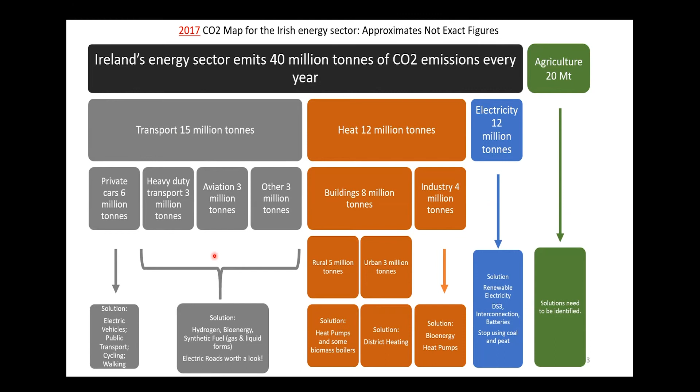So for the talk today, I was just going to briefly give you some of my thoughts on what the journey will be for the electricity, heat and transport sectors based on some work I've been involved in different parts of my career to date. I think just to say as well, the 51% target that we have for our carbon emissions by 2030, because a lot of what I'm thinking of in this talk is that short-term target of 2030.

It effectively means we need to get to 19 million tons of carbon approximately in our energy sector. So from the 40 we're at today, 51% reduction is about 19 million tons by 2030. So that's a number I'll refer to a little bit when I talk about what I think is feasible across the electricity, heat, and transport sectors.

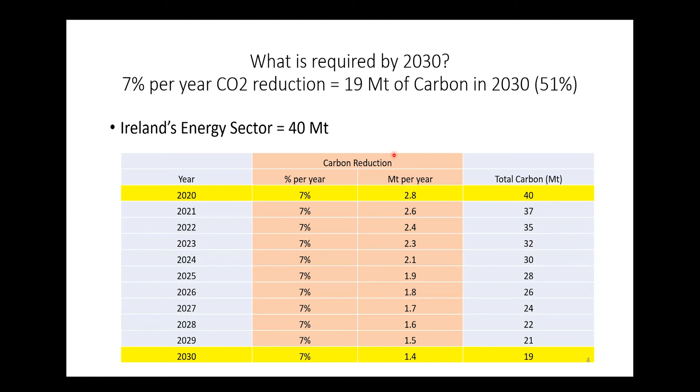So then just to get started with electricity. So the electricity is the 12 million ton block out of the 40 million ton block. So currently we have an ambition to get to 70% renewable electricity by 2030. That was a commitment made back in 2019 as part of the climate action plan, the first ever climate action plan published by Minister Bruton back in the middle of 2019.

So the 70% renewable electricity target, and again, the most important number that matters is not the renewable electricity target, it's what it means in terms of carbon emission reductions. That should get us from about 12 million tons of carbon today down to around 3.5 million tons of carbon by 2030. So that's a wonderful step in the right direction and a huge contribution to reducing down to that 19. So we need to reduce by 21 million tons over the next 10 years. This is going to get us about 8.5 million tons of that. So a really, really good start.

And because it's such a major contribution, I thought it'd be good to start here, because to say it's easy to achieve is wrong, but to say it's probably the easiest to achieve out of everything is probably right. So it's certainly not easy, but it's probably the easiest of all the things we have to do across the energy sector to get to this 70% renewable electricity target, because what it effectively requires is more of things that we're already good at. So we're really good at renewable electricity.

We've built just over 4 gigawatts today. To get to 70%, we'd probably need to get to around 10 gigawatts by 2030. We need more grid capacity, which is more ability to move electricity around the country. We need to get better at integrating our electricity. And some of the metrics that are often used about how good we are at integrating electricity are things like SNSP levels. So how much electricity from wind and solar can you have at any one time on the grid? Currently, that's at 70%. We'd need to probably get to around 90% plus to get to a 70% renewable electricity system.

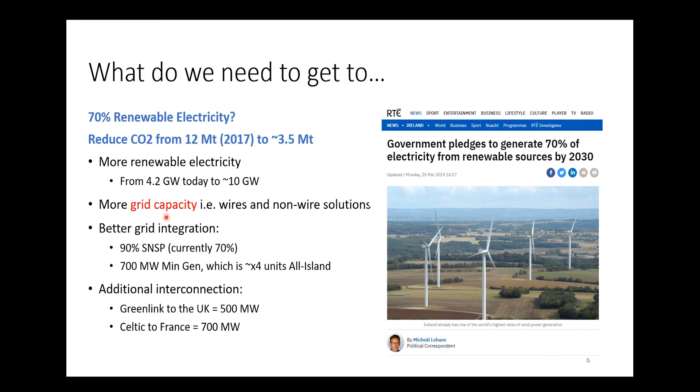Just to give you a flavor of some of the numbers of what's required, these are estimates we would have done with the Wind Energy Ireland members during my time to look at how much grid capacity is left in the Republic of Ireland right now. These are our best estimates, but they haven't been verified by EirGrid and ESB Networks. But just to give people a flavour, we found that in our best estimate there was around 2 to 2,500 megawatts of grid capacity left in Ireland's onshore grid.

So if we're at 4,000 megawatts today and we need to get to 10, we need to get another 6. There's only 2.5 of capacity left onshore to fill that up, and then it's full, completely full, and that's absolute max available. And then looking at offshore, which is another very, very promising area, there was a study done by EirGrid looking at what's feasible there, and 1.5 to 2 gigawatts is currently identified as available in Ireland's East Coast sector.

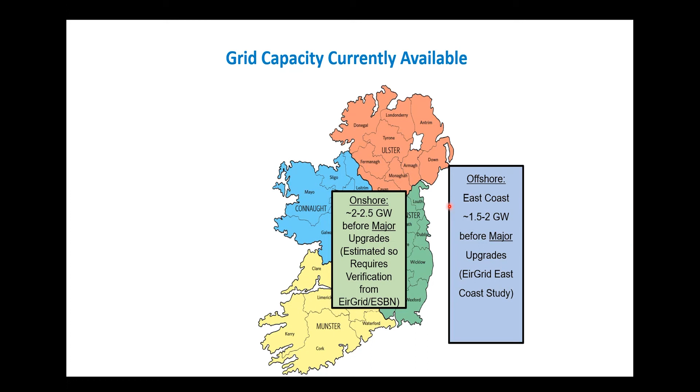So again, in terms of what we need to do, there simply wouldn't be enough grid capacity available to meet everything that we need to meet. So grid capacity is going to be a major barrier to getting us to our 70% renewable electricity target. And that's the one I just wanted to highlight in lights, because I think it's the one that's going to be the biggest challenge in the coming years.

And I think after going through all of that, 70% feels very, very achievable. I think we have an awful lot of the groundwork done to get us there. And the reason I'm saying that is I think there could even be scope for electricity to do more by 2030, because we have so much of the building blocks in place to get us to 70% renewable electricity that we should think further than 70%. And I think that'll become more apparent when I talk about just how challenging the things we need to do in heat and transport are in comparison to what we could do in electricity.

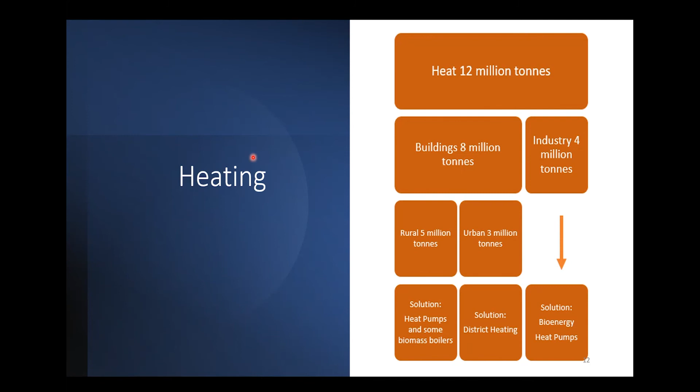So heat's next. So I'll take a few of my thoughts on where we're getting to zero carbon in the heat sector. So the first thing I'll do is just talk about the heat demand. I think the heat demand is far more important than the electricity demand in terms of understanding its characteristics. For electricity, a unit of electricity used by a large industrial plant is the exact same as a unit of electricity used by an individual for their kettle. The electricity grid has only one type of electricity on it. And that's very different to the heat sector. The heat sector has very different types of heat depending on who's using it and how they're using it.

So just to give you a flavor of the Irish heat sector and how it's broken down, about 45% is by people in their homes. About 20% is commercial buildings, so your shops, your restaurants, your small commercial premises. And then about a third is large scale industry, the likes of Aughinish Alumina, Guinness, those large industrial plants that you'd see around the place. So we have a lot of buildings. You can see 2/3 is buildings and a third is industry.

And the reason this is important, and you'll see it when I cover it later, is how industry uses heat is very different to how buildings use heat in terms of their profile. And that for me means there's different technical solutions to these. And the other thing that's very important about heat is the geographical location where it's used. For example, about 25% of Ireland's heat is used in urban areas, almost a third is in suburban areas, and almost half is in rural areas.

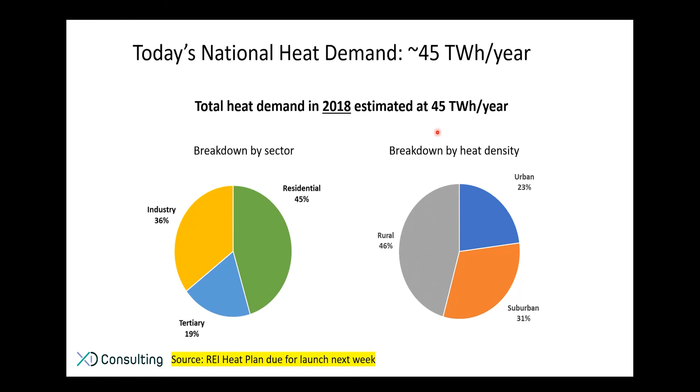And the last thing I'll say about the heat demand is in Ireland, our heat demand is currently around 45 terawatt hours. And the reason that number can be interesting for people is our electricity demand in Ireland is around 30 terawatt hours. So we use a lot more energy on heat than we do on electricity as of today, and that could change in time as we get more electricity in the heat sector. So look, I think that's just a really interesting way to look at the heat sector.

A study I used to be involved in a lot back when I was working in Aalborg University in Denmark was the Heat Roadmap Europe project. And when we looked at the building sector, so I'm just going to take that first, the building sector being this 2/3 of Ireland's heat demand, generally we had three main recommendations for the building sector. No matter what country we looked at or no matter what setting we looked at, these tended to be the same three recommendations that we would find.

The first recommendation was you need to do as many heat savings as is economically viable. And I think that won't come as a surprise to anybody. There's a lot of opportunities to insulate your attic, put in better windows, better doors, and reduce the amount of heat that your buildings need. But where I think there can be a bit of difference of opinion is it absolutely won't solve all your problems, and it is absolutely not always a good idea to continue saving heat in a building. And I'll come to that in the slide I have after this.

Like we used to find that your building fleet, at a maximum, you might be able to save about 30 to 50% of the heat demand across all buildings in a country. Beyond that, it just simply became far, far too expensive to go any further. So in other words, in all the work we did, it was never likely that you would reduce your heat demands to the point that you didn't need a renewable heat supply of some sort.

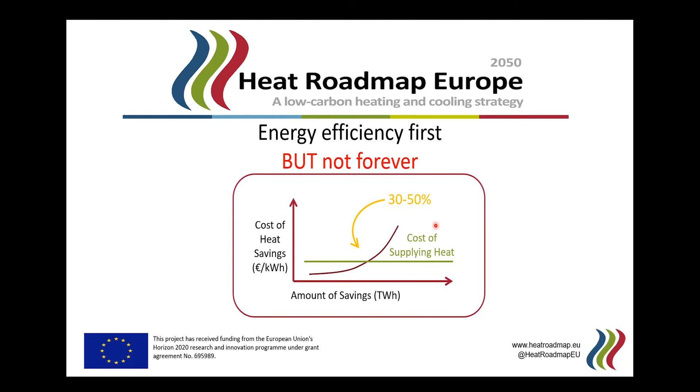And that typically happened around a reduction across the building fleet of 30 to 50%. I haven't seen yet a building fleet analysis for the entire set of buildings in a country that I was involved in that said you go beyond a 50% reduction. The cost just became extremely, extremely high. And that was the logic behind you still need some form of zero carbon heat supply.

So then if you just take this right back to Ireland, what could Ireland do to supply sustainable heat in the future? It's exactly the same recommendations that we found when we did a lot of other European countries. So district heating in the cities and electric heat pumps in the countryside. And of course, the first question I always get asked is, is district heating viable in Ireland? Because people think that Ireland is too warm, ironically, for district heating. It's about the only conversation I ever have where people think Ireland is too warm. And I can assure you it's not too warm for district heating.

So we developed this heat atlas in the Irish District Energy Association, which I'm chairperson of, and we looked at how much of Ireland's heat demand is in areas with heat densities high enough to justify district heating. These heat densities in this table here are the heat densities that Scandinavian countries use to say if an area is suitable or not suitable for district heating. So in Denmark right now, you would not find a set of buildings in an area with a heat density above 120 terajoules per kilometer squared that are not connected to a district heating system. That would be considered absolutely perfect. Anything with 120 terajoules per kilometer squared or above is absolutely economically viable for a district heating network rather than individual heating solutions.

And when we did the heat atlas, we found that 35% of Ireland's heat demand is in areas with these heat densities or above. We even have 8% of our heat demand in areas with over 300 terajoules per kilometer squared, which would be beyond perfect for a district heating system. You would absolutely never find something like that in Sweden or Denmark that isn't converted to district heating. So if people want to go to the website here, you can check out the heat atlas for yourselves. It's very interactive. You can zoom in and zoom out, but that gives you a flavor that the recommendations we used to find for other countries are absolutely valid in an Irish context as well.

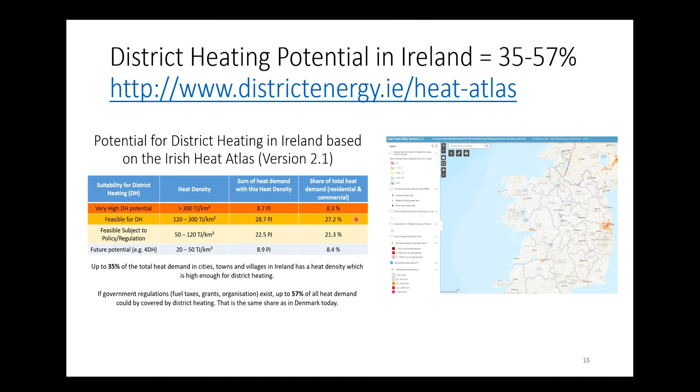And then the good news is that countries have gone there before us and shown how this can be done. People almost assume that in Denmark and Sweden it was the Vikings that put in district heating. They're like, oh, it's been around forever. Well, it hasn't.

It certainly hasn't been around forever. District heating started in Scandinavia in the 60s and 70s. In Sweden, which was one of the earliest, it was in the 60s. In Denmark, it was in the 70s. And what they did was they rolled out district heating in their cities, steady but surely over a long 30,

40-year period. So you can see this is the graph for Sweden of how much of the percentage of their heat demand has converted to district heating in the last 40 or 50 years. And it's effectively a 1% per year rollout constantly for the last 30, 40 years. So you can see even in the early 2000s, district heating was being put into buildings for the first time. So it's not a case of it's been around forever in Scandinavia. They've steadily but surely built it up.

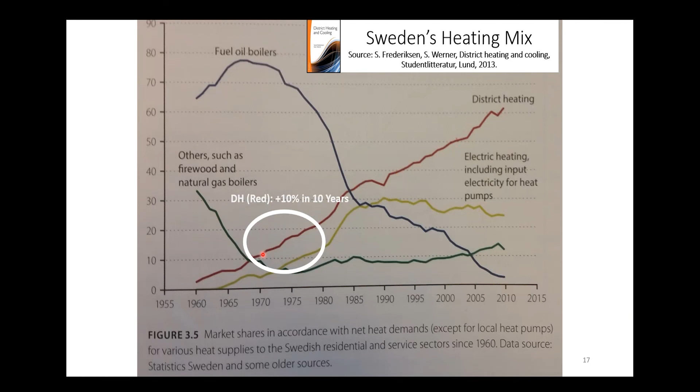And this is where I think Ireland can learn from this. We can say, well, how do they do this, and start steadily rolling out district heating in Ireland also. And what makes this so attractive is district heating is a really cost-effective and proven way to implement renewable heat in the heating sector. So if you look at the share of renewable heat in different EU countries, all of the countries with the highest renewable heat share have district heating systems.

So like Sweden has a renewable heat share of over 65%. We're at 6%. So we have so many things we can just copy and paste from all these other countries to get us up this curve very, very rapidly. And district heating is certainly one of those in my opinion.

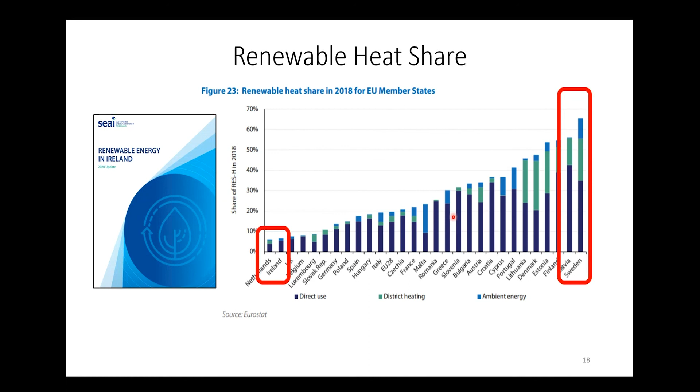The other thing on the heat sector that I will very briefly mention, but I won't spend much time on, is the heat pump side. The reason I'm not going to spend much time on this is because I think there's huge support for this already and it's happening, and there's a lot of political will to make this happen. So in the Climate Action Plan in 2019, there was a target to get 600,000 heat pumps in Ireland by 2030. So that's exactly in line with what we would have recommended in the Heat Roadmap Europe work we were involved in.

The only thing I would add that's really important is that these individual heat pumps should be prioritized for rural and suburban buildings. In other words, those urban areas are where we need large scale heat pumps, not individual heat pumps. So that might be a nuance, but something maybe very important in terms of how we roll this out, because we don't want to lock ourselves into asking somebody to switch to a heat pump in 2028 and then coming back and asking them to switch to district heating in 2035.

So just so we don't lock ourselves into stranded assets down the road, I would argue that the best place to put these 600,000 heat pumps is in as many rural buildings as we can, especially replacing oil boilers. And I think the really great thing about heat pumps that I'd make one quick reflection on is not only do they give us a huge efficiency gain, which I'm sure many of you are familiar with, but effectively they make the homeowner zero

carbon. Of course, heat pumps are not always zero carbon depending on your supply of electricity, but they do move the responsibility of becoming zero carbon from the homeowner to the electricity grid, which is a really important benefit because it means you as an individual have done your part of decarbonizing your home, and it's then over to the electricity grid to decarbonize to finish that circle. And as I mentioned in the first section, I think we're really doing very well in electricity. So I can see this being a really good outcome for Ireland.

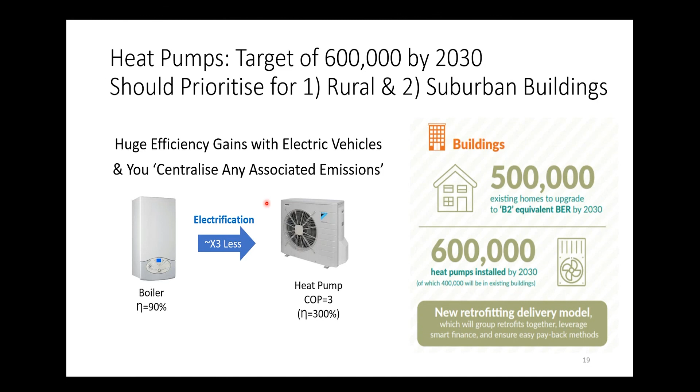So overall for buildings, it's heat savings, district heating in the cities, and heat pumps in the rural areas. I won't spend too much time on this either, but I just wanted to say I think it's a really critical area. It goes back to my CO2 map at the start. You might remember, or if you even just look at it afterwards, heat demand was 12 million tons overall. 8 million tons was buildings, 4 million tons was industry. So industry is an absolutely critical part of the decarbonisation story for heating.

But the one thing I just wanted to reflect on in the heat for industry was that temperature is probably the most critical thing when it comes to the way that industry uses its heat. So if you looked at buildings, geography and location was critical. Was it a heat network or was it an individual heating solution? With industry, there's a very, very large bandwidth of temperature profiles required for heating. Everything from less than 100 degrees Celsius heat is needed all the way up to above 200 to 400 degrees Celsius heat. Even above 400 degrees Celsius is needed sometimes.

And this temperature level has a huge influence in terms of what solution is viable for you to decarbonize your industrial heat activity. Because once you go to above 200 degrees Celsius, your number of solutions decreases dramatically, because typically heat pumps are not suitable for above 150 to 200 degrees Celsius. So it rules out certain solutions depending on the temperature level you're at.

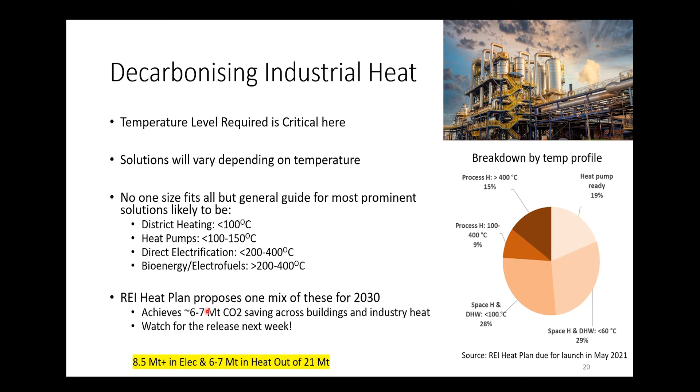So that just means on top of the 8.5 that we had in electricity earlier, plus the 6 to 7 in heat, we're about 13, 14, 15 million tons along the journey that we need to get to by 2030 of 21. So there's still a big gap for transport to fill, which will be the last thing I talk about. So it just gives you a sense of the scale of the challenge. So next week, when you see the REI heat plan, if we did everything in that, I think it would still only get us to 6 or 7 million tons of a reduction, which is still a huge, huge challenge.

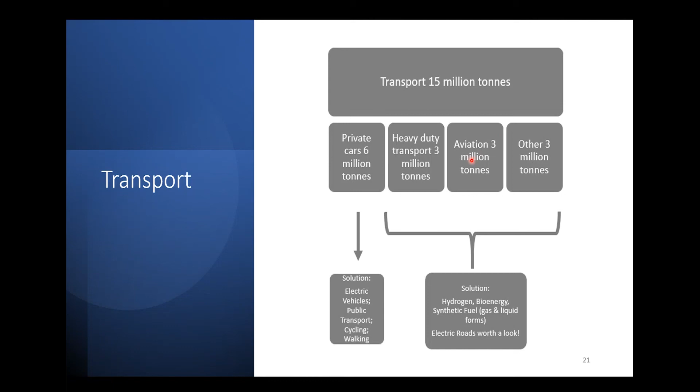And then finally, with transport, I'm just keeping an eye on the clock, so I won't spend as much time on this as I did on heat. But this is my breakdown of the transport CO2 emissions of 15 million tons: private cars, heavy duty, aviation, and other. And I've purposely done it like this, as I'm sure you've guessed, because private cars, of course, have electric vehicles, whereas the other applications are going to struggle to use electricity, at least directly anyway. So I'll talk very briefly about what I think are really promising solutions for transport, the first being electric vehicles.

And you can see from the layout of this slide, it's very similar to my slide on heat pumps, because I think electric vehicles are very, very well recognized as a promising solution for 2030 and for Ireland's decarbonisation journey. So again, I'm not spending long on it, because the narrative is so well established and the ambition is so well established for electric cars. The 2019 Climate Action Plan is aiming to get 1 million electric cars on Ireland's roads by 2030. That's probably as ambitious as we possibly can be.

And just like heat pumps are more efficient than boilers, one thing that's really great about electric vehicles is not just that they're zero carbon, but they're also much more efficient. So an electric car is about 4 times more efficient than an internal combustion engine.

So we get really great gains in terms of energy efficiency, as well as getting our carbon footprint down quite a lot as well by moving to clean electricity rather than fuel. And I suppose that's the obvious. I don't need much more to maybe reflect on it. I think it's a really great thing that we have so much support for electric vehicles. I think out of electric vehicles, this million EVs I think will save about 2 to 3 million tons out of the carbon footprint that transport has.

And I suppose this is why I was really just adding up the numbers as I went along, because what we're doing today across electricity, what we could maximum do in heat, and what we're going to do with electric vehicles, if you add all of those up together, you're probably getting somewhere in the region of 17, 18 million tons, but we need to get 21 million tons. So I'm sure it won't come as any surprise to anybody on this talk that what we're doing is incredibly ambitious, but it's still not going to be enough.

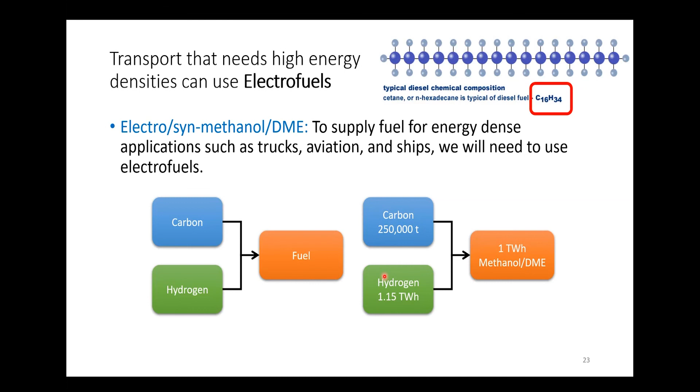So for example, methanol is a very common replacement for petrol, and DME, dimethyl ether, is a very common replacement for diesel. And if you want to produce 1 terawatt hour of methanol or DME, you need about 1.15 terawatt hours of hydrogen, and you can produce that using clean electricity. And you need about 250,000 tons of carbon that you sequester from somewhere. And if you do that, you can then create fuels from clean electricity. And there's a lot more detail on this in a paper I wrote a few years back. This expanded diagram just gives you a flavor of where the different forms of carbon and hydrogen can come from.

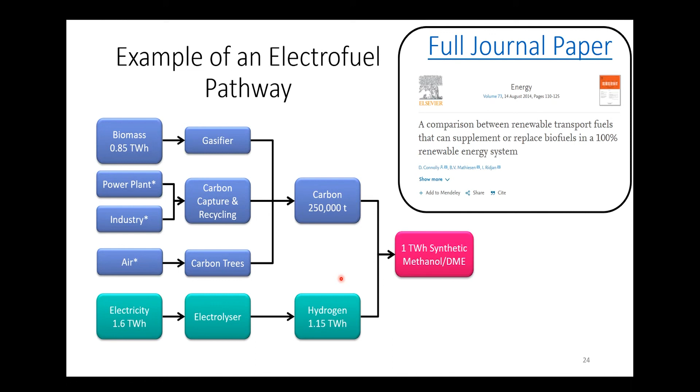But what makes this so exciting then is you can start to go beyond electric vehicles in the transport sector and start to use clean electricity to produce fuels. And the other thing just to say here, by the way, is if we can't capture the carbon, we could try and find ways to use the hydrogen directly. But what makes that a bit more challenging is the vehicles are not readily available to do that just yet. So we don't have like a hydrogen plane or a hydrogen ship at the moment, but that could emerge in the coming years. But this could be a way for transport to do more than just the electric vehicles, which is the primary solution that we have for transport right now. And I think I'll leave the rest of transport.

You can look through my other 2 or 3 slides on transport if you want afterwards. I think the last thing I'll just reflect on is what brings this all together. So what I've described there obviously is monumental changes across electricity, heat, and transport. But one thing worth checking out is this website, smartenergysystem.eu. There's a really nice video of about 15 minutes that describes the concept of what the world looks like when we do all of these changes across all of these 3 sectors and how they work together.

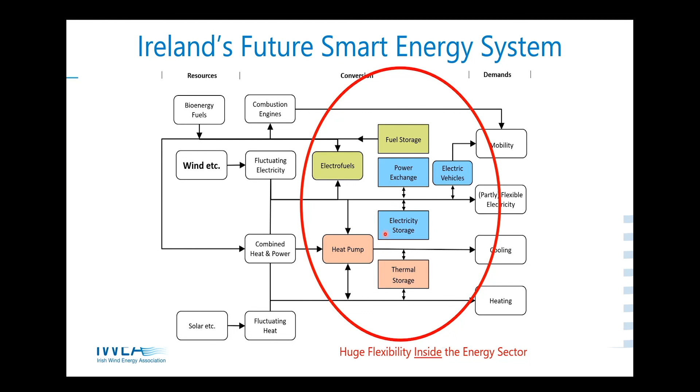And this is the type of modeling we would have done in EnergyPLAN in Aalborg University: the reason that we can start to then rely on zero carbon energy systems that are built around wind and solar is that we have all of this flexibility within the energy system to manage the weather effectively. So we lose fossil fuels, which means we lose a lot of energy storage, but we compensate for that by creating an awful lot of energy storage and flexibility inside the energy sector. And this is what used to be really interesting about modeling these things, is how all of the lights could stay on and all the homes stay heated by getting the right amount of energy storage inside the energy system.

And I'm just conscious of time, so I'll just wrap up by saying, Green Plan Ireland was a study I did a few years back, which modeled all of these things in a lot more detail. So if you're interested, you can go to the website here and read about Green Plan Ireland a bit more, which will go into a lot more detailed modeling. And the last study I launched in Wind Energy Ireland before I finished up was a study we did with UCC and MaREI, which showed what a zero carbon Ireland could look like in a lot more detail than I've described today, which is very much just the high level messages. And as you can see, a zero carbon Ireland in 2050 is almost all wind and solar and bioenergy, as we used to find in the smart energy systems work that we did in our university in the past.

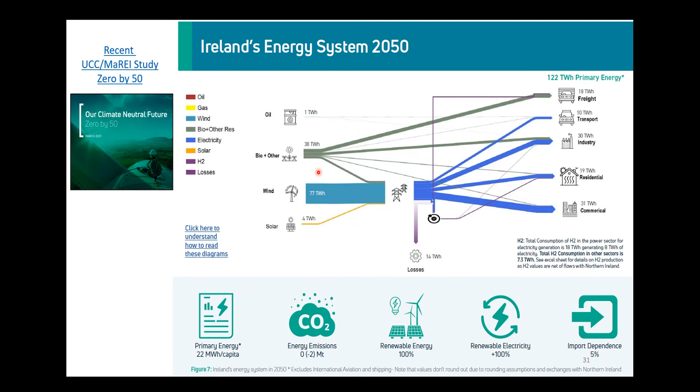So I think I'll leave it there, and hopefully you got a flavor of what the journey to zero carbon looks like from a technical perspective, at least. I'll finish by just saying what I started with, which was, I think the technical journey is going to be the easy part. I think the tough part is going to be the political and social changes that have to go on beyond all of these technologies. But that's a whole other presentation, but definitely an area that would be very interesting to have more research done on in the future. So happy to take any questions, Cormac, that people have, and hopefully it was useful.

No, I can't thank you enough, David, for that presentation. I think it gives a wonderful oversight to what's happening and how we are going to have to change every aspect of our lives in many respects. So I'm happy, guys, to open it out to the floor for any questions. I have some questions, but I'm more than happy if anyone else has some burning questions first to ask David.

You'll get the short straw, Cormac. Greg, you have a question there.